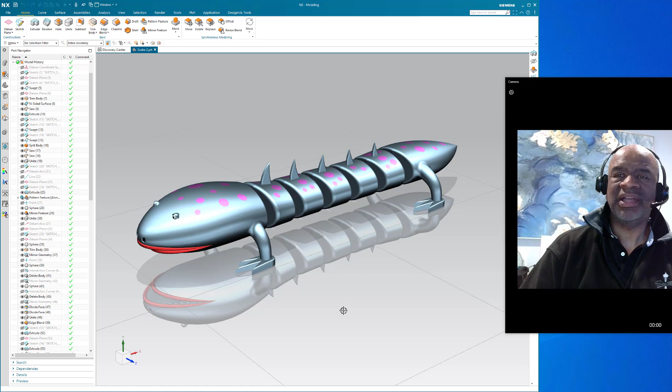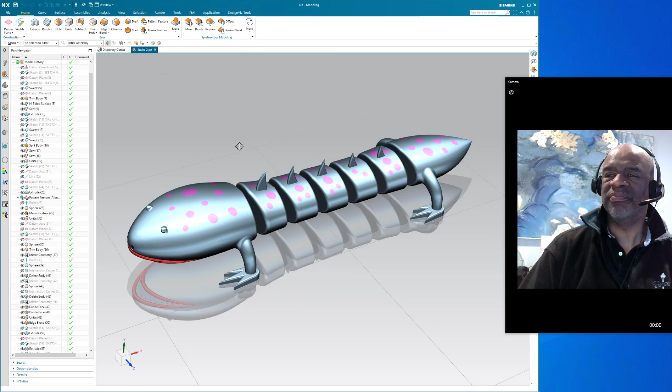Thanks for your support. This little piece of geometry is something I threw together pretty quickly, because I wanted to play with the animation ability and make a little slithering being of some sort. It's kind of a cross between a snake and a lizard, and obviously it's something I just made up out of my creative head.

It's always been interesting to me that when certain people think of mechanical engineers, they don't think necessarily of creativity and the process of creating something from scratch. It's really important to me, and I think in order to be a good engineer, you pretty much have to be very creative. You're always solving problems that are intractable and difficult, and that's why they hopefully pay you the big bucks. So the creative ethic, I believe, is something that can be developed.

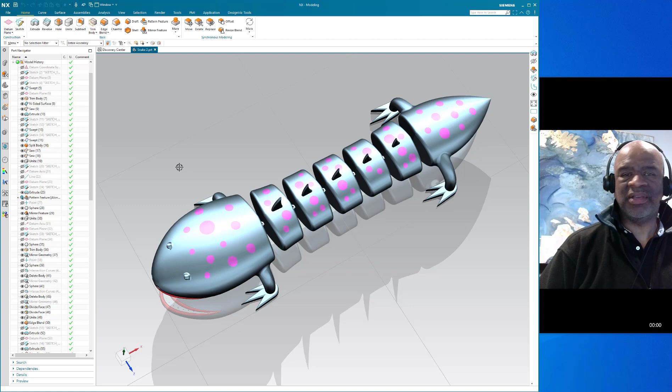A lot of people say you've got to be born creative, and people think of painters and sculptors and tend to think that has to be an innate thing, and it may be. I don't know, but I think it's possible to expand your creativity and practice your creativity.

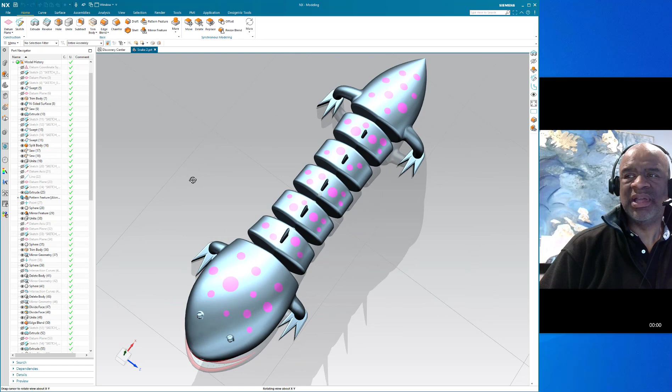I know that when I was a young kid, I had an amazing set of parents. My mother, especially, was creative. My mom was a quilter and somebody who would sew incredibly wonderful jackets and pillows, and she was always sewing something. So she was very creative.

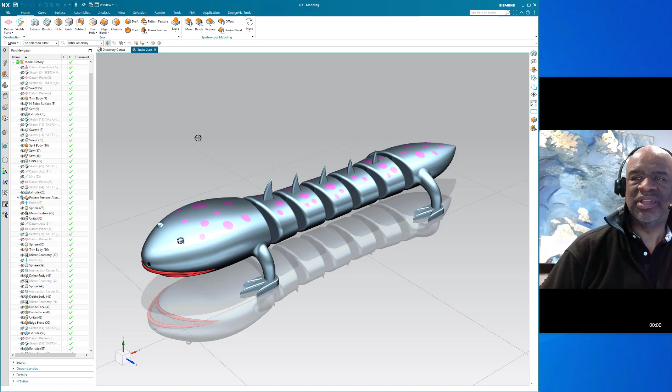However, my dad was the kind of sculptor, painter. He would work in paper mache. He ran an art shop. He was the principal of a school.

And I think I learned a lot of creative skills and the whole process mostly from him. And a lot of the creative process just came from being left alone with stuff that I could work with, paints and popsicle sticks and so on and so forth.

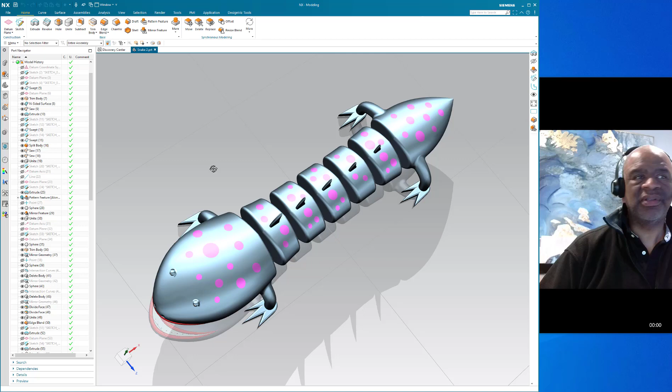My dad used to take us, my brother and I, to the junkyard, and we would get junk and take it apart. That was an incredible learning experience that went on for years. Of course, back in the day, you could actually go to a junkyard and walk around. Can't do anything like that today.

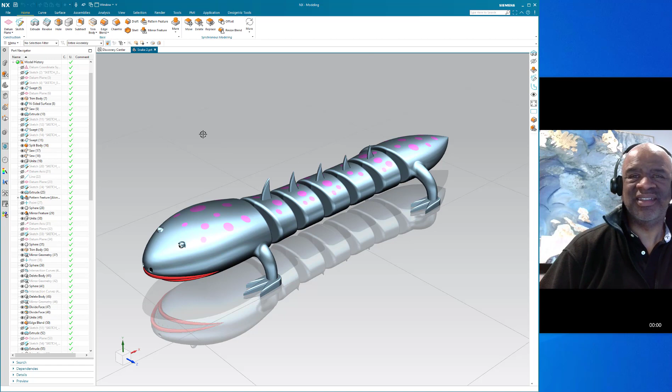Anyway, this model, I'm showing on the screen how to build it. I start with sketches and I do sweeps, etc. And at some point, I go to the animation package and I start animating it.

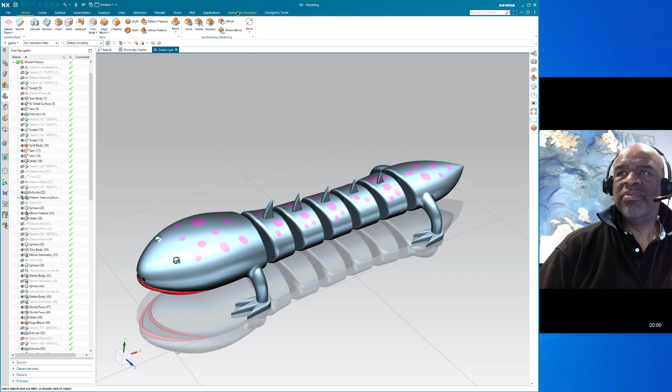You'll see that I've broken this model up into a bunch of different sections. Here it is, animation designer. I've broken this up into a bunch of different sections, and I've put revolutes in every little section there.

And then when I hit play, it does this. So it's really kind of cool. And you have to kind of choreograph this thing, and there's some really nice little methods of doing that. You can put it on repeat so it keeps slithering.

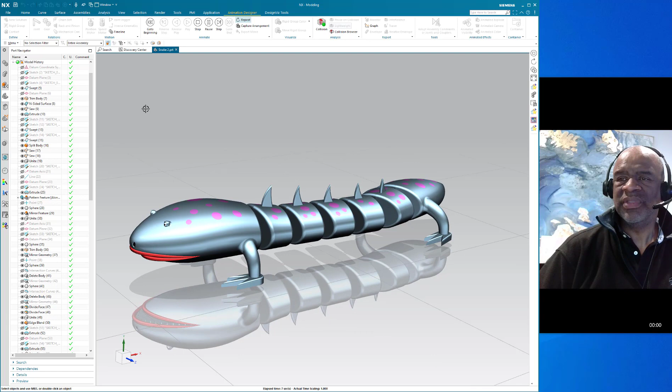In this little video, I use the timeline. The timeline makes it much easier to start playing around with the different movements. So there you have it, a slithering little being with eyes and teeth, and he's got a nice little shape.

So that's what this video is about. But creativity is important to practice.

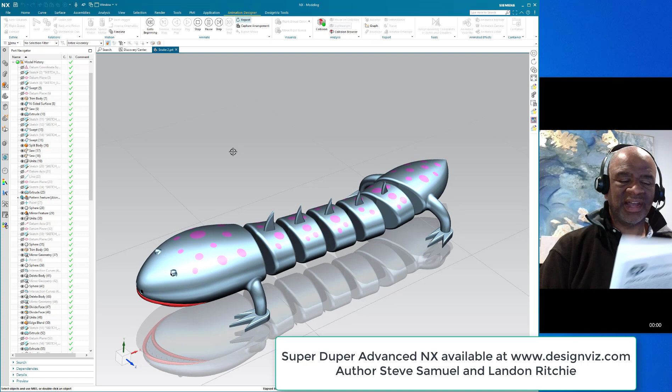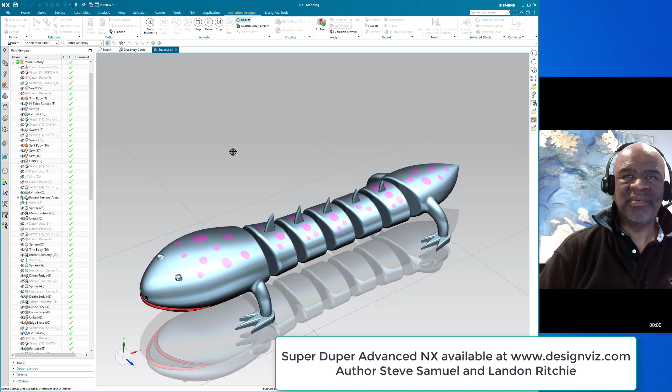Now, that said, let's talk about some of these modeling techniques that I used to make this little beastie, and I'll go through it as quickly as I can.

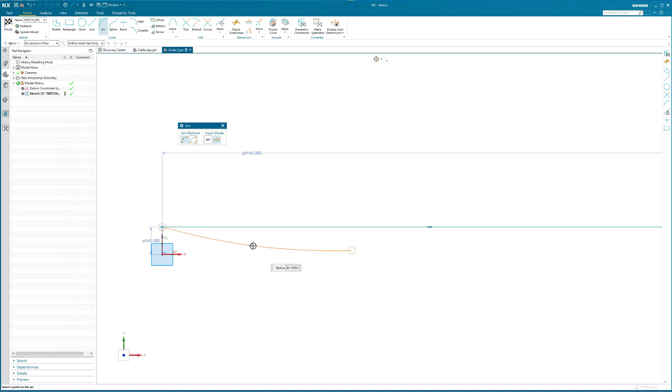So we start with datum planes and a sketch on the XY datum plane, and I'm creating a side view, set to 40-inch length, and I start putting on the other entities that will create this nice little shape of the head, shape of the back, shape of the mid section.

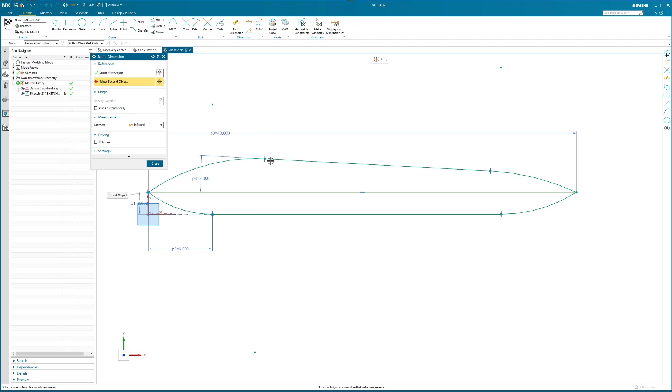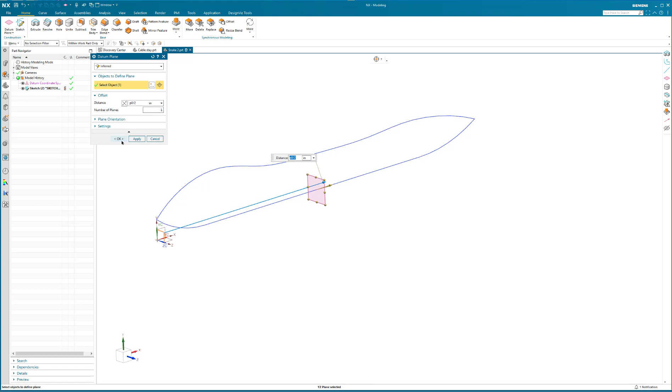My aim here is to create a top and bottom contour, knowing that the sweep I use in the next phase will be driven by a top curve, a bottom curve, and a curve in the center. One thing I love about the sweep function in NX is that you can put a section in the middle of something and drive it with multiple curves, up to 3 curves. You could have, I think, 220 sections.

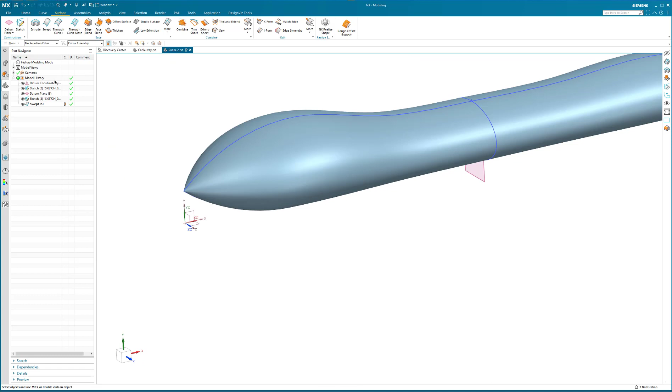So here I'm creating an ellipse, and I want it to intersect with the top and bottom curve, so I'm putting intersection points with the sketch plane of the ellipse onto the top and bottom curves, and then I'm sweeping it with the bottom curve and the top curve, which creates a swept freeform feature.

Then I trim off the nose because I want it to be rounded, and I use an N-sided surface for that, which is a very nice technique.

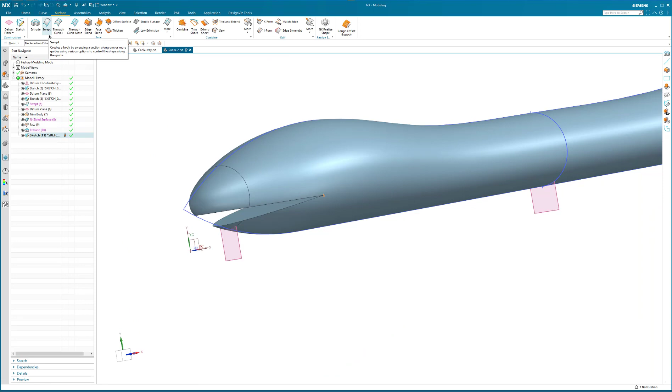I sew it all together to make a solid, and then I create a little sketch and extrude to cut the mouth out. Then I want lips, and I want them to start with sharp corners where the lips intersect, and to be fuller as they go along.

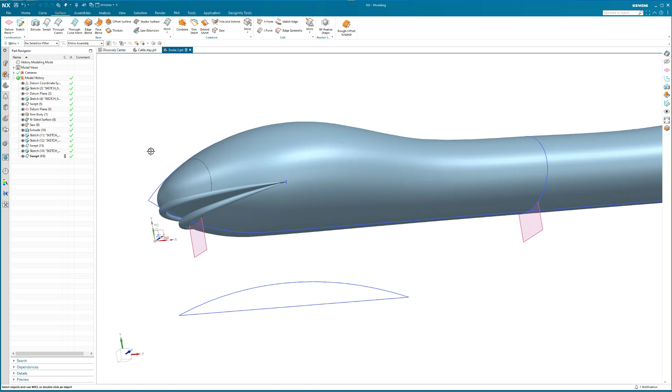So I'm doing a swept freeform feature, using this little graph, this line and arc, to drive the diameter of the circle as it's swept along the edges of the mouth. You can see the lips start with sharp corners, go out to their full diameter, and then come back.

And I make solids out of those and add it on.

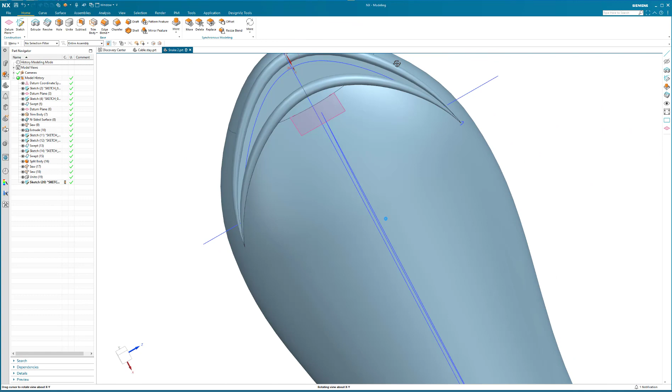Then I want to do teeth, and the teeth are offset from the roof of the mouth. So I make an offset curve, a datum axis, and a line segment that allows me to place a plane on the datum axis and the line, which then allows me to create a sketch.

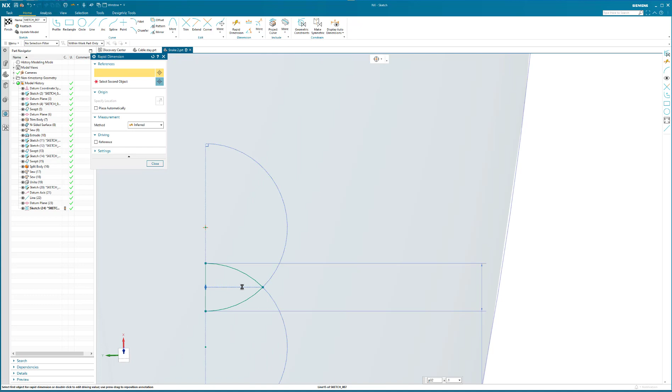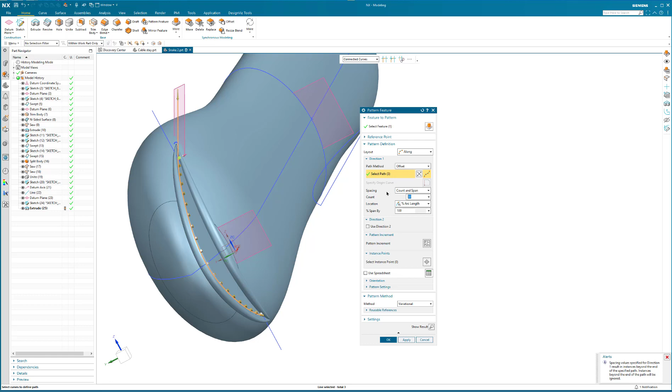The sketch is very simple - just a line segment with 2 arcs, perpendicular to that little line segment. Then I place that sketch onto the drive curve that I made as an offset curve, and I get to pattern it along. I believe I put about 30 teeth here, along 100% of the length of that offset curve, and there you go - I've got the little teeth.

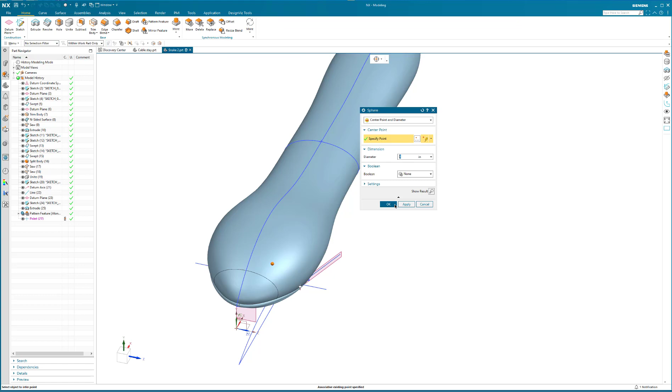They were a little too small, so I went to the spreadsheet to edit the height of them. With the spreadsheet edit, if you use the pattern with the spreadsheet, you can edit the length of each individual tooth.

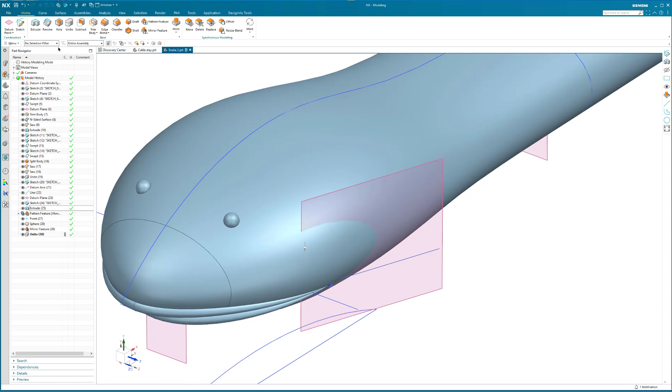Then to make the eyes, I put point entities on the face of the solid, and I experiment a little with the length of the solid, etc. I put a point entity there, created a sphere on the point entity, and united it together - those are my little eye shapes.

But then I want the eyes to have eyelids, so I'm making another sphere, but I'm going to cut that sphere in half with a datum plane that I'm creating on that location. In order to create the datum plane, I'm using a datum axis that goes through that point and perpendicular to the face of the solid.

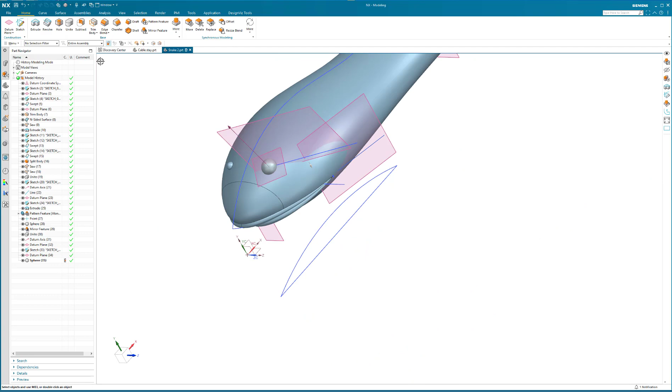And I'm using a little sketch, making an L-shaped sketch if you will, and putting a datum plane on it, using that datum plane to trim the little spheres that are just a little bit larger than the original sphere, so that makes a really nice eyelid.

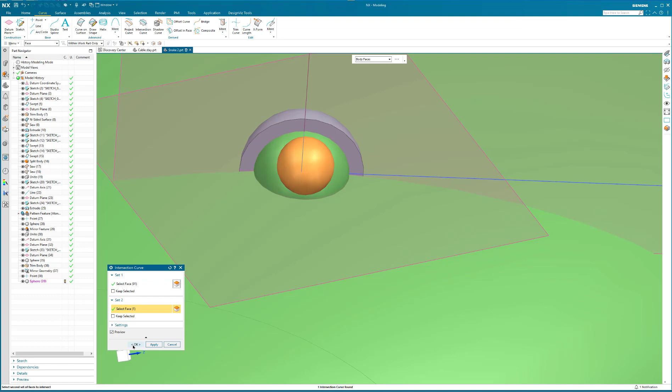Then in order to make the actual eyeballs, or the pupils in the eyeballs, I put another point on that face of the sphere. I define a smaller sphere, and then I do two intersection curves, which are used to subdivide the face of the sphere.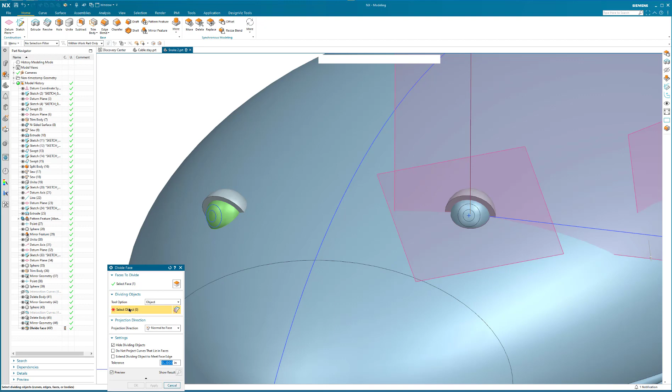And when I subdivide the face, I can then colorize the different facial regions - so there's a black and white, and then I fillet it nicely. So that's how I make the actual eyes.

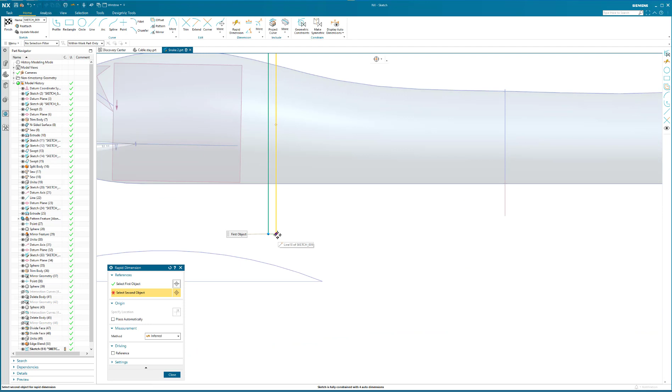Then I want to break this model up into the sections that I'm going to use for the animation.

You could imagine that this is a toy. I've seen toys made like this, with a bunch of sections and hinges, so you have something that's able to move in a snake-like fashion.

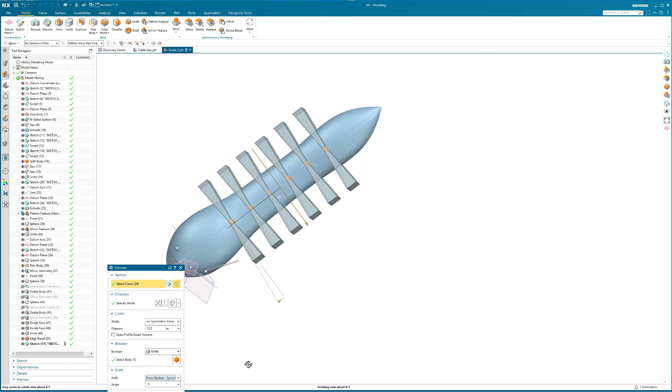Here I'm doing an extrude that is a symmetrical extrude with a symmetrical taper, so each section has that nice little tapered shape.

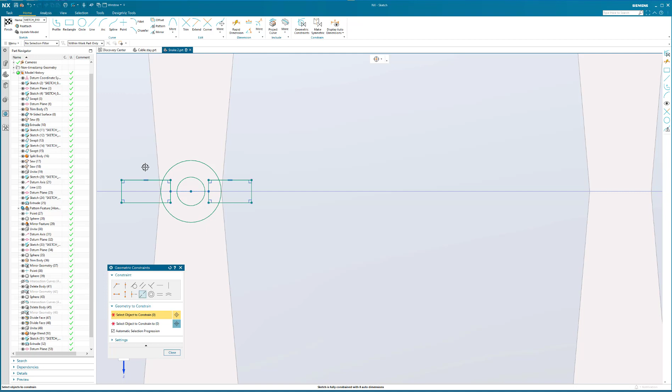Then in order to connect the sections, I'm making little eyelets, one on the left and one on the right. The one on the left is going to be higher than the one on the right, but I'm using the same sketch to do it. In order to use a sketch with multiple contours, it's really great to master the technique of stop at intersection, so you can use these sketches with multiple contours very easily.

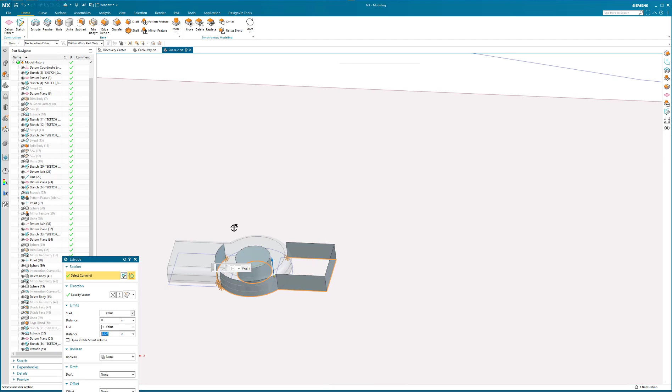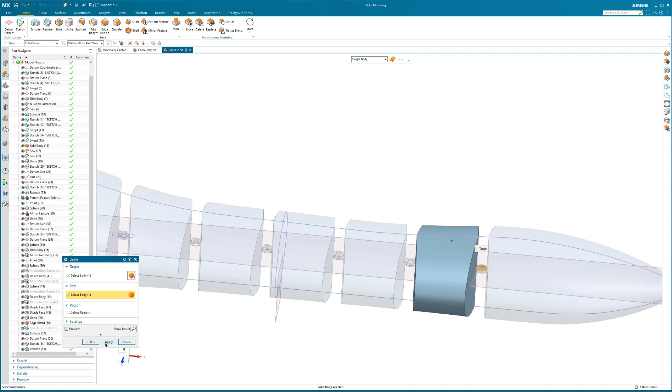So I do that twice, one upper and one lower. I give them little fillets, and because this is NX, I can easily pattern geometry, not just features. So I pattern those so I have enough eyelets to be in between all the sections. There's an upper and lower eyelet, and I unite those all together, so each section of this little beast knows what to do.

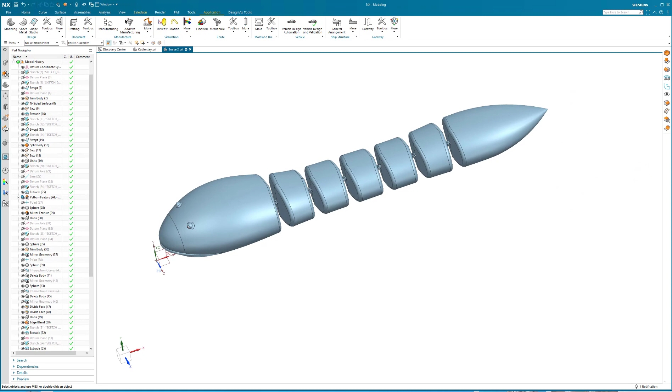Then I fillet with the new technique of filleting. It highlights all the similar edges, and you just press the button and the whole thing fillets. You don't have to go select every single one. That's a really nice new function they have in the fillet tool.

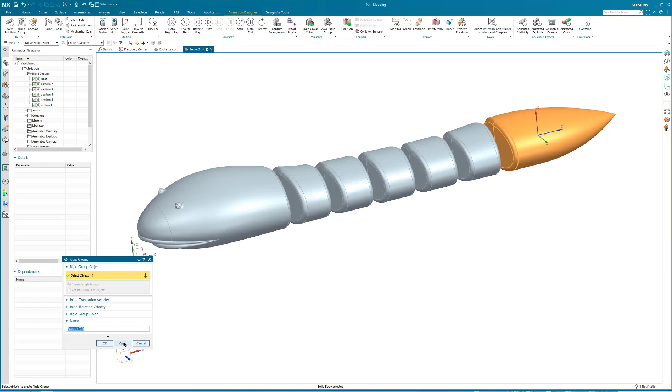This is 2206 I'm using, and of course I've already started to use 2212, and so far they've done a really nice job, and they've added some functionality, and it is superb.

The next thing I'm doing is making all the rigid bodies in the animation package, and then when I have the rigid bodies, I'm making the revolutes that are in between every single joint.

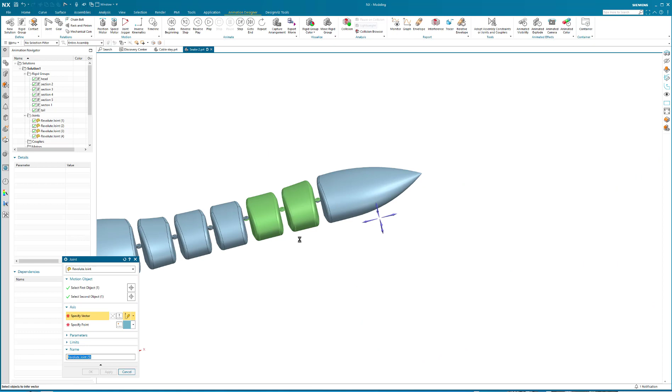The revolutes are easy to create. You just select the two entities that you're going to make a revolute between, then you find a common point and a common vector, and the revolutes are created. As you can see, there's 6 revolutes.

The model is very well organized, and once you have the revolutes, you can put on position motors. You can put on speed motors too, but for this particular thing we need to choreograph it and pay attention to the timing, so the revolutes have to spin sequentially, one following the other.

I'm giving a 1-second interval, and here I'm placing the position motor on each revolute and editing it so that it has a start and an end.

Here I'm testing it. You can see it kind of folded in on itself, and that's because one of the revolutes still had its default 90 degrees on it, I guess. But I'm doing this on the basis of 20 degrees, and I'm experimenting.

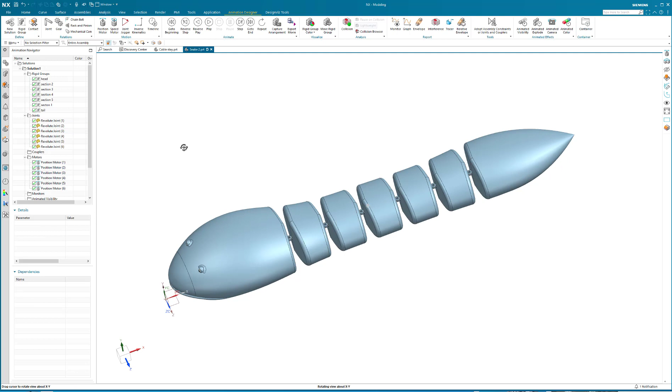When you start doing this, you'll notice it gets a little tedious editing the position motors. So a better way to do it is with the timeline, which I'm showing you here. With the timeline, you can easily move these events back and forth, edit each one, and change the timing.

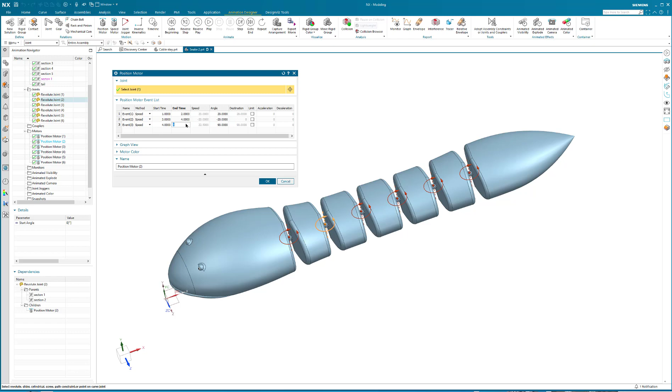Here I still have that 90-degree thing on one of the revolutes, so I get rid of that, and now it's moving in a pretty cool fashion.

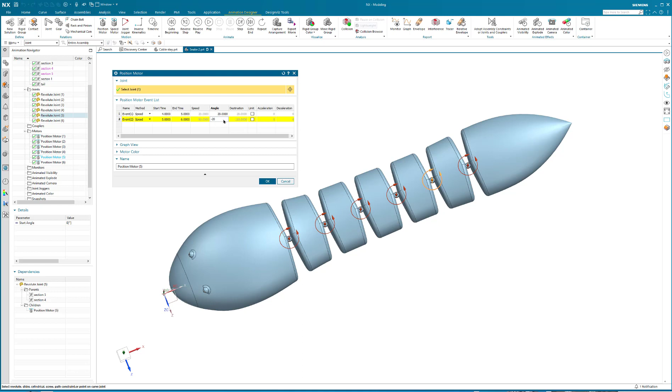So I just make a few more tweaks to the different position motors, and I'm almost ready to go with the final motion of this thing. I'm experimenting with different entities, and I think I'll probably continue to experiment as well. Then I'm going into the timeline and making sure everything is the way I want it.

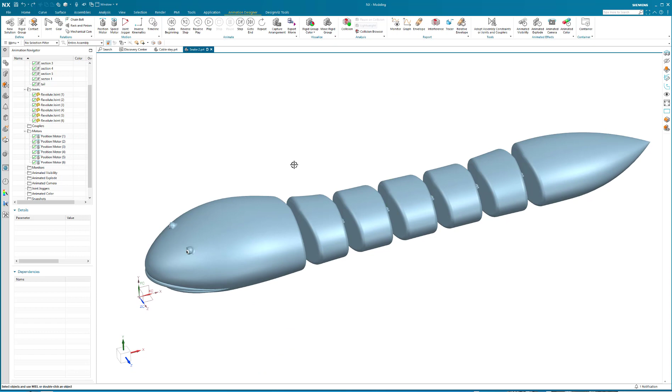Once I do all of this, I can start putting the little polka dots and the fins on the model and so on. Then I start making colors on the lips and doing some other modeling, but I'm done with the animation.

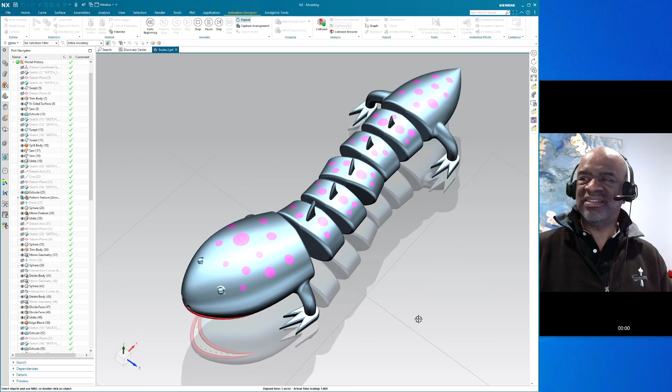So here's the finished product. This little beast has the polka dots, the little fins, and the little feet, and his animation is set to repeat, so he's happily slithering and slithering.